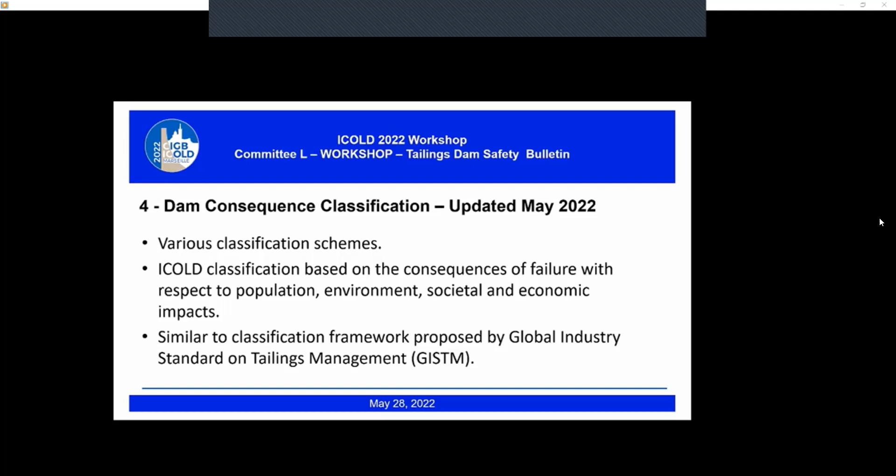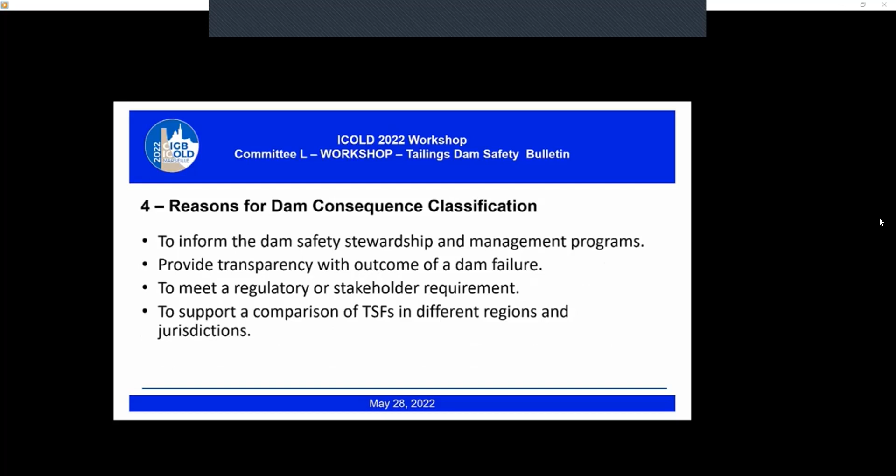The Dam Consequence Classification is used to inform the dam safety stewardship and management programs, provide transparency to external stakeholders on the outcome of a dam failure, to meet a regulatory or stakeholder requirement, and to support a comparison of TSFs in different regions and jurisdictions.

Dam Consequence Classification is used to inform the selection of design loading criteria. The design criteria based on dam consequence classification is typically considered as a minimum. Other factors need to be considered when establishing the design criteria, such as the potential impacts to the owner and the potential risks to life safety.

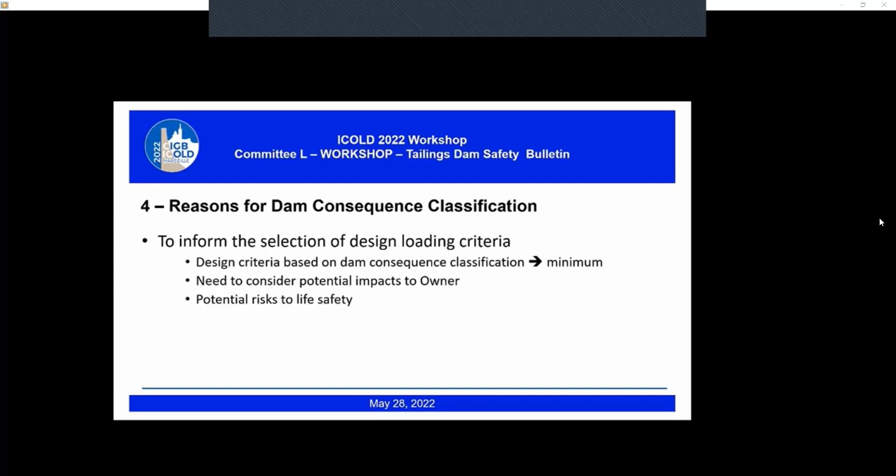When classifying a dam, we assume that a failure mode may occur that is physically possible and has a technical basis for occurrence. This has to be a very rigorous undertaking to demonstrate which failure mode you're considering.

And the dam consequence classification is supported by an estimated runout or inundation. That does not necessarily mean a detailed runout or inundation study—it could be simplified as well.

A confusion that we often run into is that consequence classification is used interchangeably with risk. That is not the case. We're just focusing on the consequences here. We're not addressing the likelihood in the consequence classification, and therefore the consequence classification should not be considered as a measure of risk, because likelihood is not taken into account.

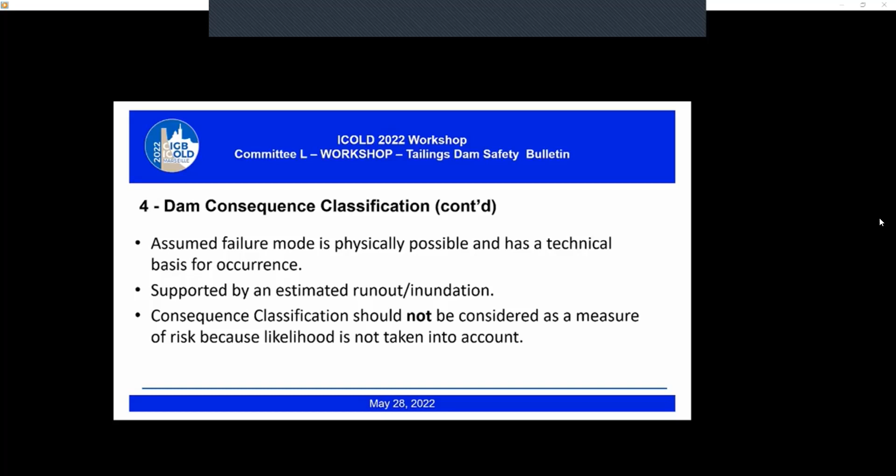We recommend that the dam consequence classification be done for two conditions: the sunny day or fair weather failure condition, and the flood failure or wet weather failure condition.

Often, the dam consequence classification is initially assessed qualitatively with a simplified approach. More detailed dam breach analysis and inundation may be required for high consequence classification dams and above.

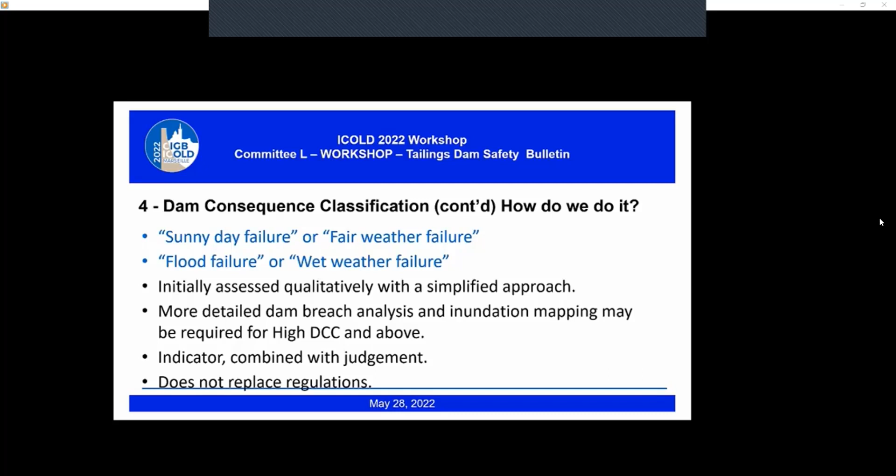The dam consequence classification that is developed needs to be considered as an indicator and still needs professional judgment to arrive at the consequence classification. And obviously, the dam consequence classification scheme does not replace what's required by regulation.

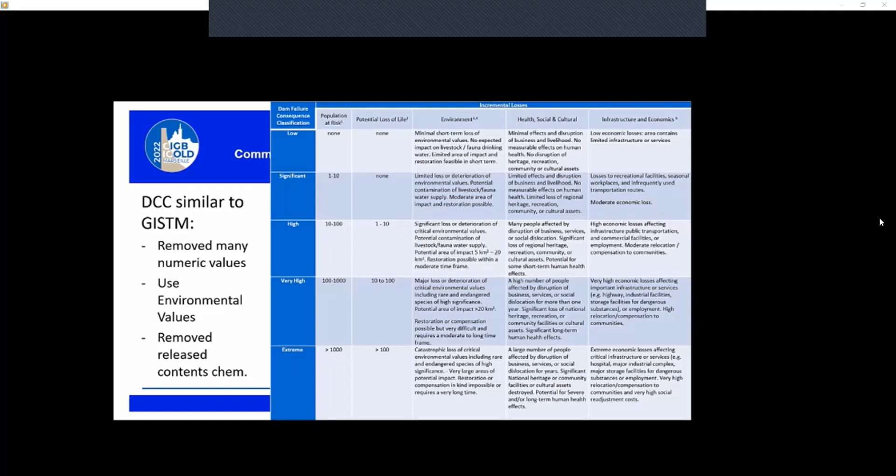So just to focus in on the high consequence classification: population at risk between 10 and 100, potential loss of life between 1 and 10. Under environment, a significant loss or deterioration of critical environmental values, and we define those. Potential contamination of livestock, fauna, water supply.

We're often asked, well, what about human water supply? Well, that is picked up under health, social, and cultural, as well as infrastructure and economics, in terms of providing replacement water supplies. The potential area of impact between 5 and 20 square kilometers, and restoration possible within a moderate time frame. And what does moderate mean?

Well, again, that becomes jurisdiction specific. In some cases, restoration can occur within a few years and be quite satisfactory. In other cases, it may take longer to get there, but that still may be considered as a moderate time frame.

Under health, social, and cultural, many people could be affected by disruption of business, services, or social dislocation, significant loss of regional heritage, recreation, community, or cultural assets, and there could be some short-term human health effects.

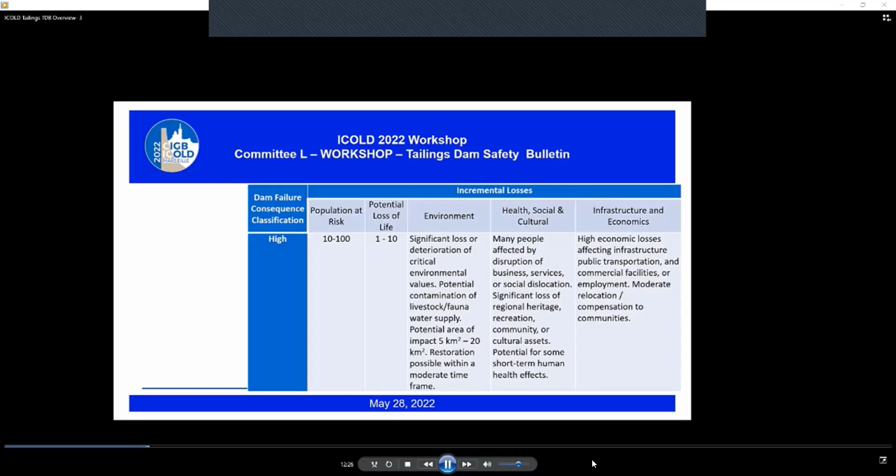Under infrastructure and economics, high economic losses affecting infrastructure, public transportation, and commercial facilities or employment, with moderate relocation compensation to communities.

There can be a misperception in industry that by designing a dam for high consequences, that is potentially 1 to 10 lives lost, then if the dam were to fail under conditions that were larger than what the design criteria had been adopted, then it would be somehow acceptable to have more than 10 fatalities. That was not the intent of the dam consequence classification framework.

A key purpose of the dam consequence classification framework was to provide a rational, objective, and transparent framework for classifying a dam. So when you say to someone that the dam is classified as significant, that's understood. That means something. Or if you say the dam is classified as very high, that means something.

When it comes to establishing the design criteria for the dam, and we said this earlier, the owner needs to decide on that design criteria that considers potential risk to life safety. As indicated by the ICOLD guidance, extreme loading conditions are being recommended for dams with even one potential loss of life, and several mining companies are adopting that approach.

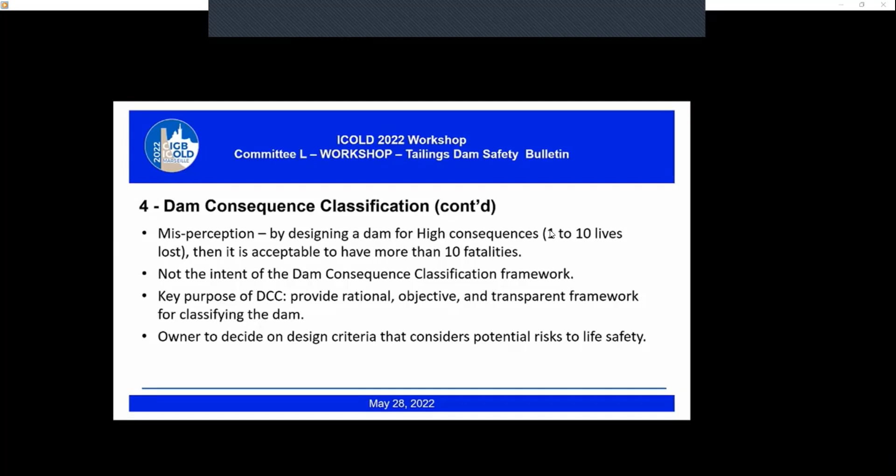Many of you are familiar with the concept of credible failure modes that was introduced by the GISTM in 2020. In 2021, ICMM provided further definition to the credible failure mode concept, but there's still not a consensus in our industry on how to define these.

From ICOLD's perspective, where we focus on the design and safety assessment, we did not address credible failure modes. You will note that in doing the dam classification, we're asking that you focus on failure modes that are physically possible and have a technical basis for occurrence.

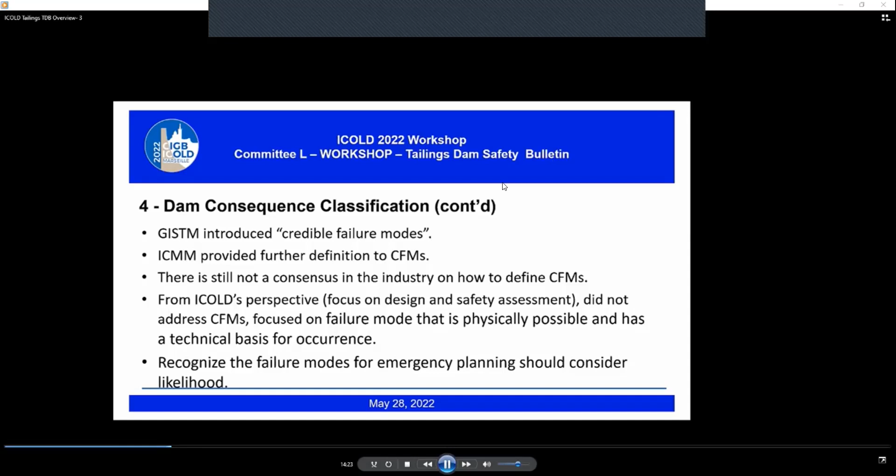Now, we do recognize that for emergency planning, this may not be appropriate, and that the failure modes for emergency planning should consider likelihood.

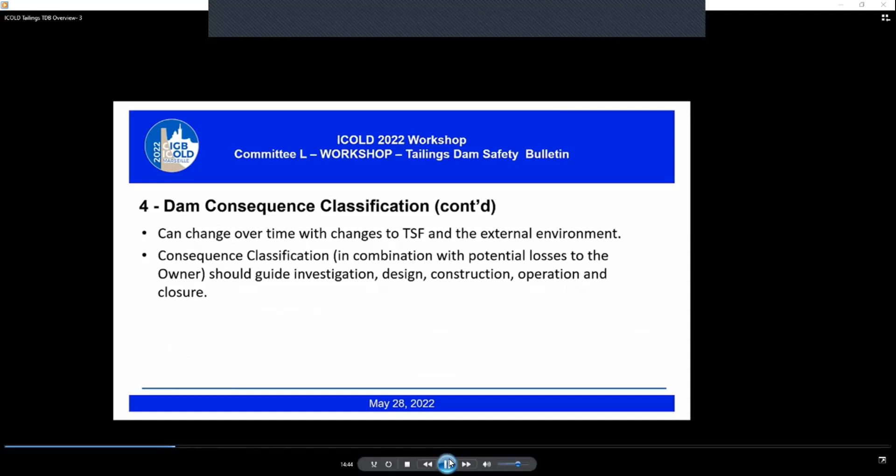This last slide on Chapter 4 indicates that the classification can change over time with changes to the TSF and external environment. The consequence classification, again in combination with potential losses to the owner, should guide the investigation, design, construction, operation, and closure. Our next speaker is Jerry Herzog.

So we're just going to take a pause here for a moment because that's a very important chapter that we just went through. And wondered if anybody had any questions or comments on what they've just seen here.

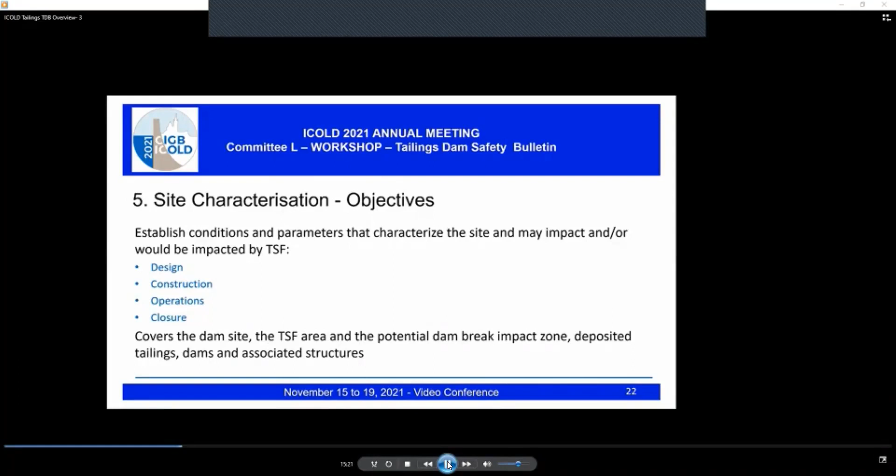The objectives of site characterization is to understand and define the parameters and characteristics of the TSF site that might be impacted by the TSF, or that might impact the TSF design, construction, operation, and closure. It covers not only the dam site itself, but the tailings storage area, as well as the potential dam break impact zone, and the tailings themselves, as well as any other important structures.

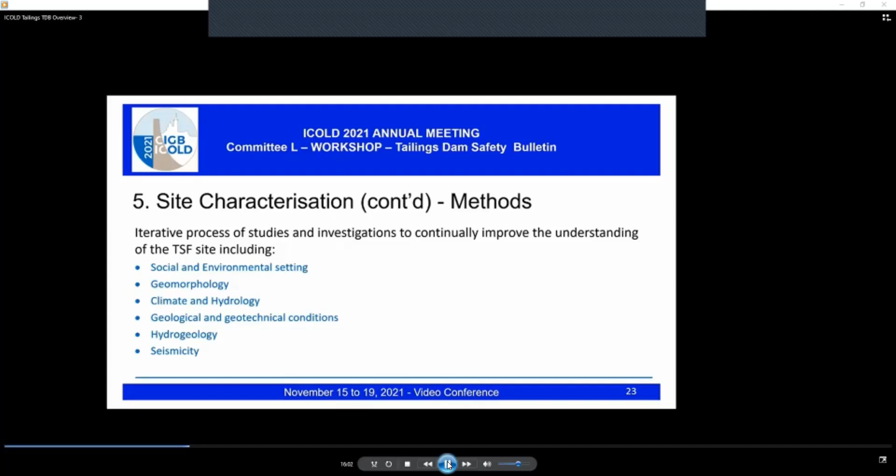The objectives—next slide, yeah. To achieve those objectives, we describe an iterative process of studies and investigations to gradually improve our understanding of the TSF site from many different perspectives: social environmental setting, geomorphology, climate, hydrogeology, seismicity, and most importantly, for the integrity of the dam, the geological and geotechnical conditions, which I will talk about a little bit more. Next slide, please.

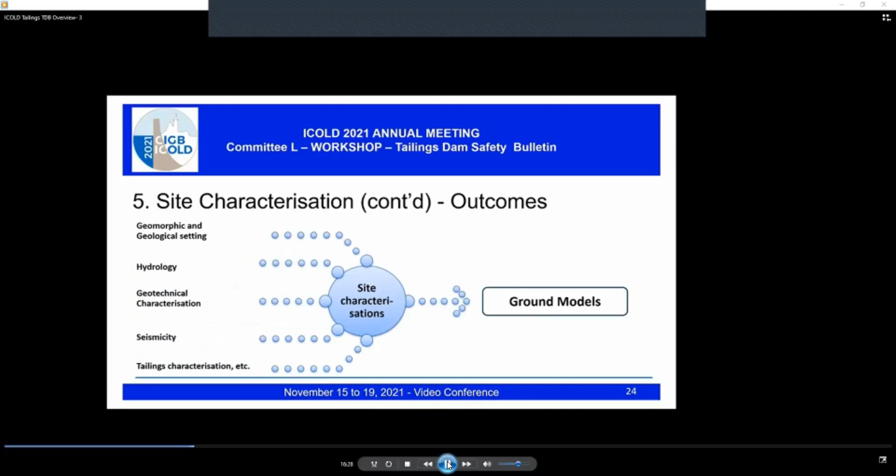The outcomes of the site characterization, which is basically a process of integration of knowledge, are ground models. The ground models describe a specific setting of the TSF site from geological, hydrogeological, or other perspectives. The ground model captures the factual conditions and information for the respective objective of the model. It might be a geological model that captures the setting.

The ground model is then used to define design models, which capture interpreted conditions to be used in specific design for specific purposes—for example, assessment of seepage or assessment of seismic induced deformation of the embankment. Finally, the design model is then transformed into an analytical model, which is the actual numerical model in which the assessment is carried out. It might be a finite element model, finite differences model, or limit equilibrium model for stability assessment. Next one, please.

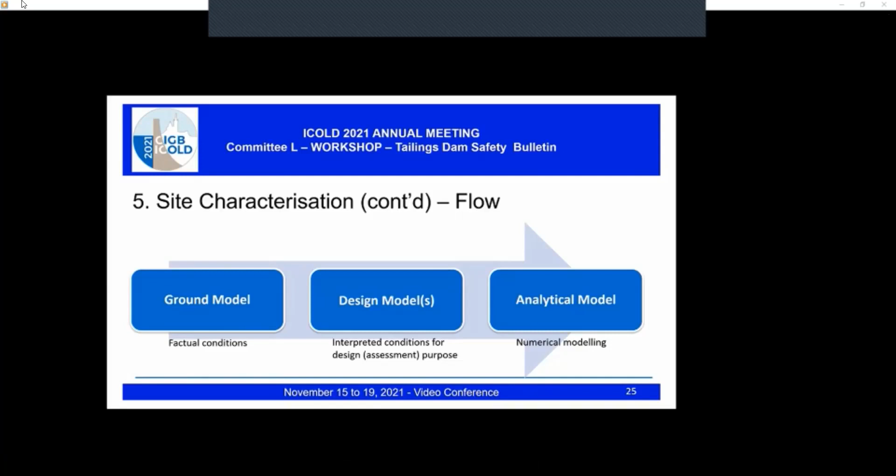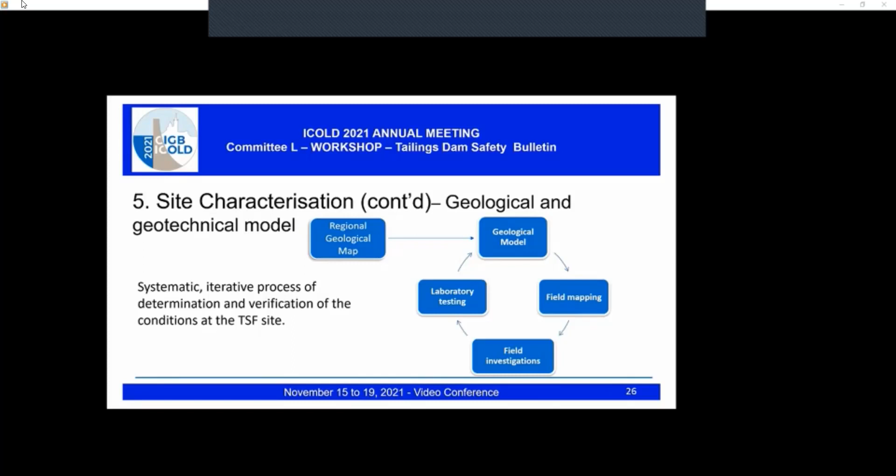In terms of the geological and geotechnical model, we start the process with understanding the regional geology using regional geological maps, which are generally available. These are the basis for the TSF site geological model. The site geological model is then refined through field mapping, field investigation, and laboratory testing in a systematic iterative process to determine and verify the conditions of the TSF throughout the design life, from planning to closure. Next one.

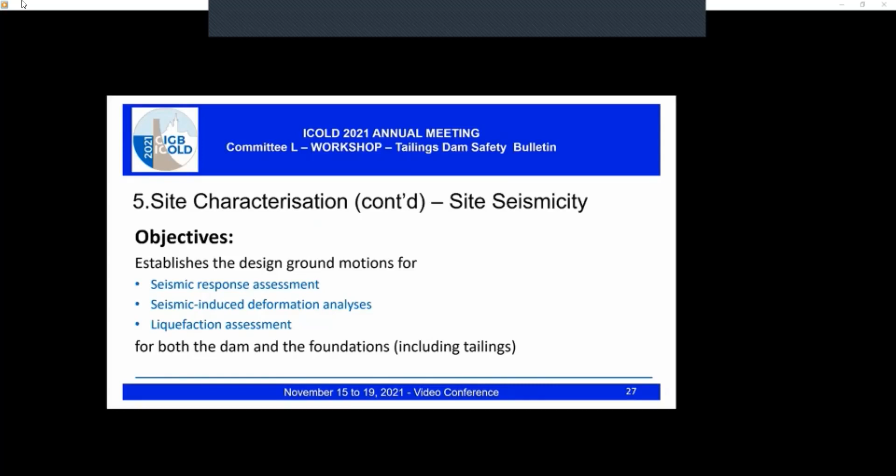Site seismicity is a very important aspect of TSF performance, and the objective described in our bulletin is to establish design ground motions for seismic response assessment, seismic induced deformations, and liquefaction assessment for both the dam body itself and the foundation beneath. Very importantly, we have to establish those for the tailings themselves, for upstream and centreline structures, which partly or fully depend on the tailings integrity.

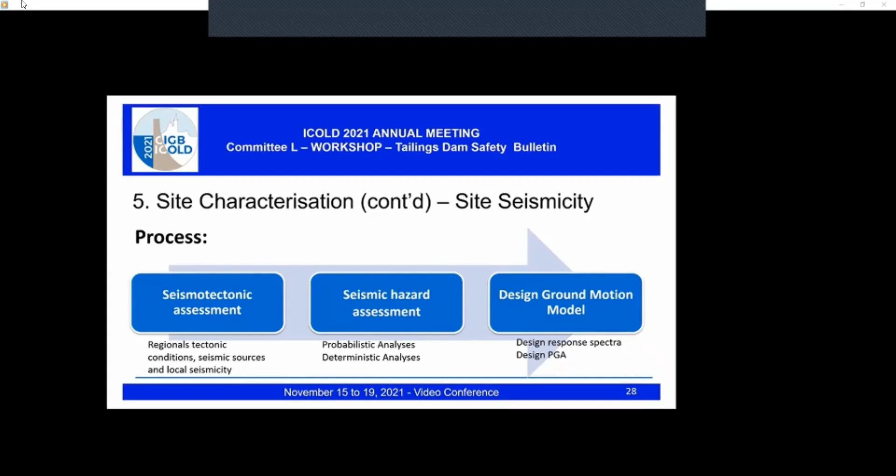The site characterization for site seismicity is described as a process of 3 steps, starting with a seismotectonic assessment, in which we define the regional tectonic settings and conditions, identify seismic sources, and define local seismicity. The next step is a seismic hazard assessment, typically carried out through probabilistic or deterministic analysis. The last step is the design of the ground motion model, which is then used as an input for design response spectra and design PGAs for a given facility.

The way it's written in our bulletin, we provide thorough recommendations for characterization of the seismic setting. We recommend that site-specific hazard assessment is performed for most tailings dams, definitely for those with high or extreme consequence category. We put more emphasis on the probabilistic method, but recognize the importance of the maximum credible earthquake defined by deterministic methods, while recognizing that the MCE might be quite frequent in highly seismic zones. In relatively stable regions such as Australia, the design earthquake might not need to be greater than an 84th percentile of MCE, because the MCE doesn't really happen that often.

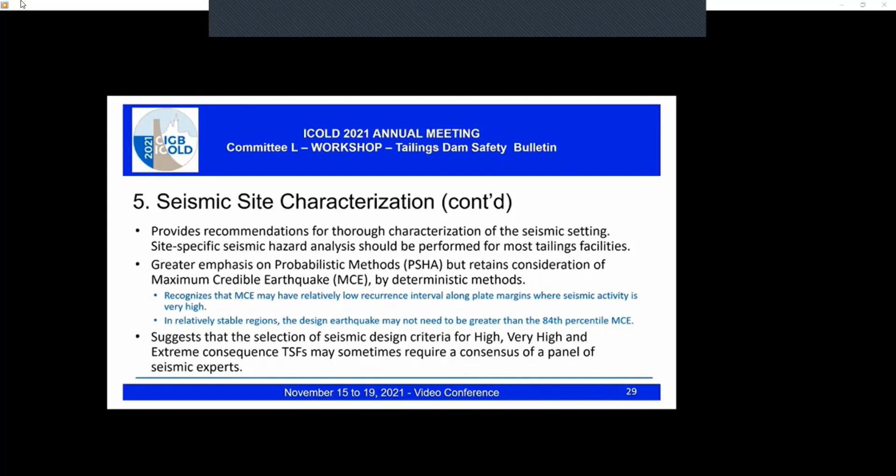In recognition of the very complex process in defining the seismic condition for some sites, we recommend that for very high and extreme consequence tailings storage facilities, it's appropriate to engage a panel of seismic experts to get a consensus of the site-specific seismic hazards.

Tailings characterization is part of the site characterization, but for its importance we have devoted a separate chapter to it in our bulletin. This chapter is based on ICOLD Bulletin 181, Tailings Dam Design Technology Update, which is now available for everyone to purchase and access through the ICOLD website.

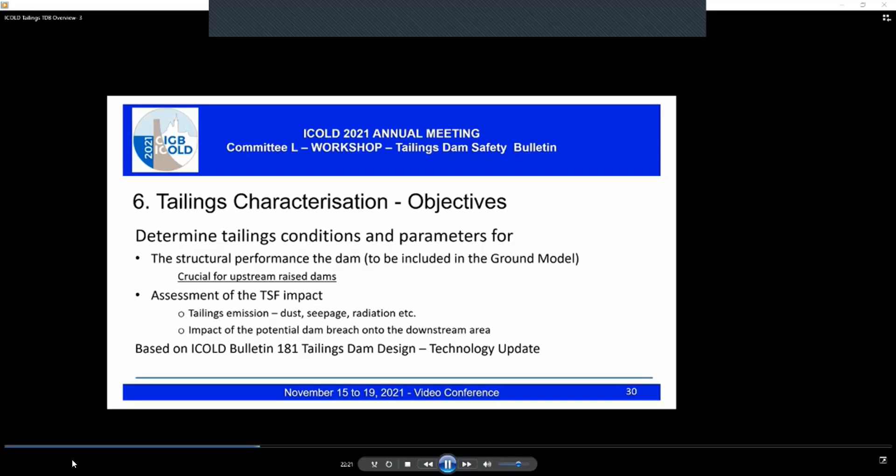The tailings conditions and parameters are important from two perspectives: the structural performance of the dam, and the impact of the TSF on the environment. The structural performance is dependent on tailings, especially for upstream raised dams. The assessment of TSF impact on the environment includes tailings emissions through dust, seepage, radiation, etc. It also impacts potential dam breach and the impact onto the downstream area, which we'll talk about a little later on.

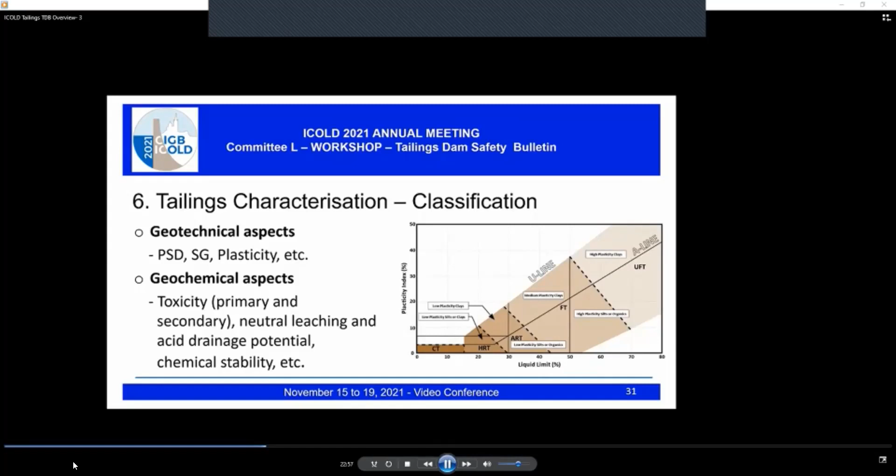The first step in tailings characterization is classification, and we follow two aspects, geotechnical and geochemical, in describing and classifying the tailings. The geotechnical aspects follow conventional geotechnical tests, such as PSDs (particle size distribution), specific gravity, and plasticity, while geochemical aspects follow toxicity, neutral leaching, acid drainage potential, and other chemistry. The draft bulletin follows the classification system introduced in Bulletin 181, separating tailings into 5 broad categories, shown on the table in front of you.

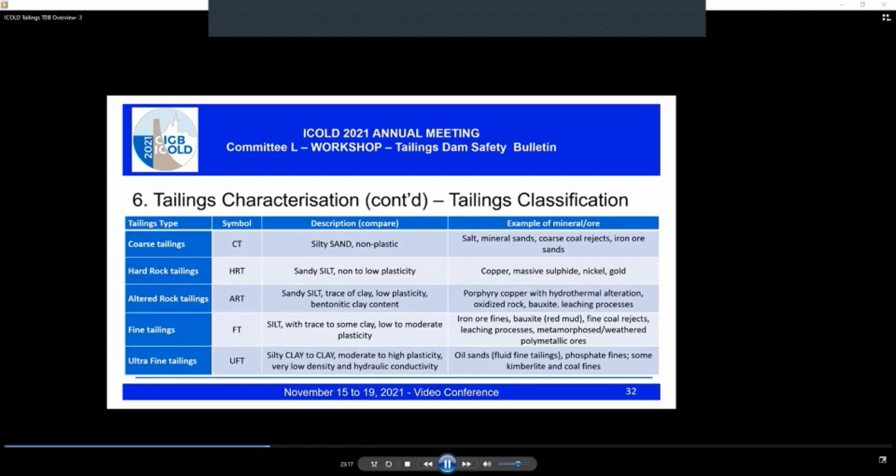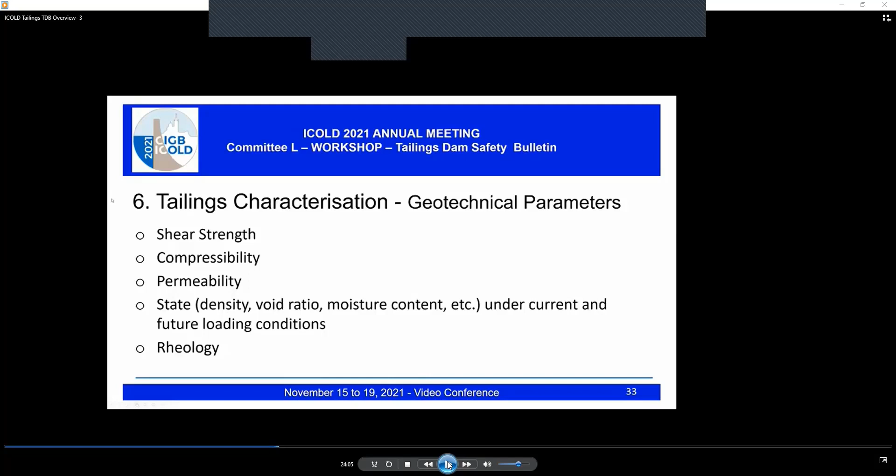So we'll move into a talk. Andy Small will lead this portion on risk-informed design and other aspects. Andy? So good day, colleagues.

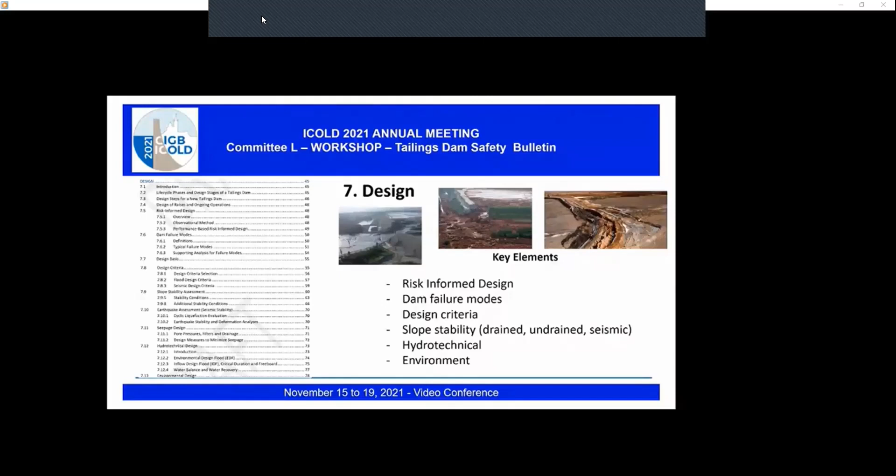Risk-informed design - many of you are familiar with it, and you're aware that it goes beyond the traditional standards-based approach. David talked about the consequence classification earlier, fair weather and flood classifications, which are really used to inform the flood designs and the earthquake seismic design.

There isn't really a linkage for things like internal erosion, for example, to the consequence classification. So we see the risk-informed design as quite complementary to the standards-based design, and we refer to it as an enhancement.

The risk-informed design also has a strong linkage to the observational method, and many people don't understand the observational method. They see it as synonymous with monitoring the dam. That's not the case. To use the observational method properly, it's necessary to predict and measure the performance, and if the performance isn't suitable, then you implement contingency measures.

That's the piece I often see missing - owners have not actually developed designs for contingency measures. They don't know if those contingency measures can actually be implemented. If they do not have contingency measures and they cannot be implemented, then they are not following the observational method - they're just monitoring. The observational method doesn't work very well for dams with brittle elements, such as Brumadinho.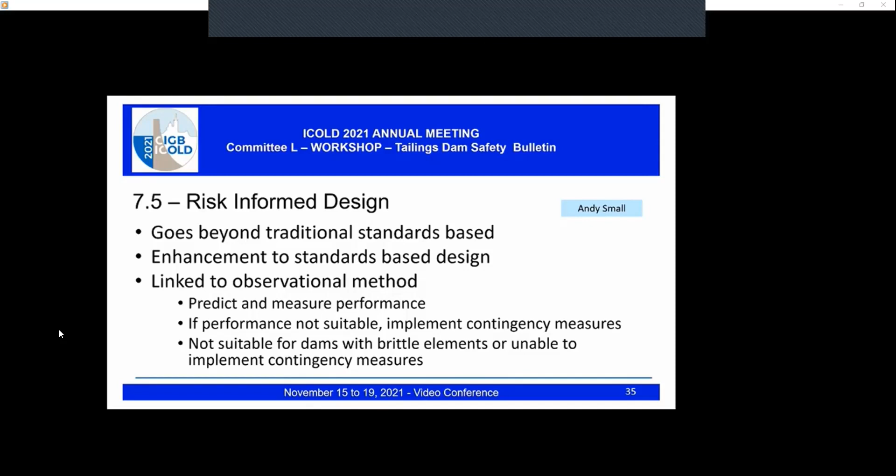I expect most people on the phone are familiar with Morgenstern's DeMello lecture in 2018, where he introduced this concept of performance-based, risk-informed, safe design. These terms actually have been used in other industries - he just brought them over to our practice. If you go into his DeMello lecture, you will understand more about what he's describing.

With his blessing and approval, we distilled his DeMello lecture down to the following points: identify the failure modes, identify the performance parameters, establish the performance criteria, establish trigger action response plans, monitor and document performance, and take action depending on that performance.

Now, it looks very similar to the observational method, and in fact it is. But what the PBRISD process calls for is more significant rigor, a much deeper dive examination on the failure modes when establishing the performance criteria, supported by very robust analyses. The TARPs are a lot more detailed, and so on. So there is a similarity, but there's a higher level of rigor if you want to use this approach.

We're seeing this approach being used particularly in Alberta and Canada. And the owners are providing safety statements on their dams based on their performance, and in fact are not necessarily reporting things like factor of safety. They're showing how the dam deformations are performing as expected, and therefore the dam is safe.

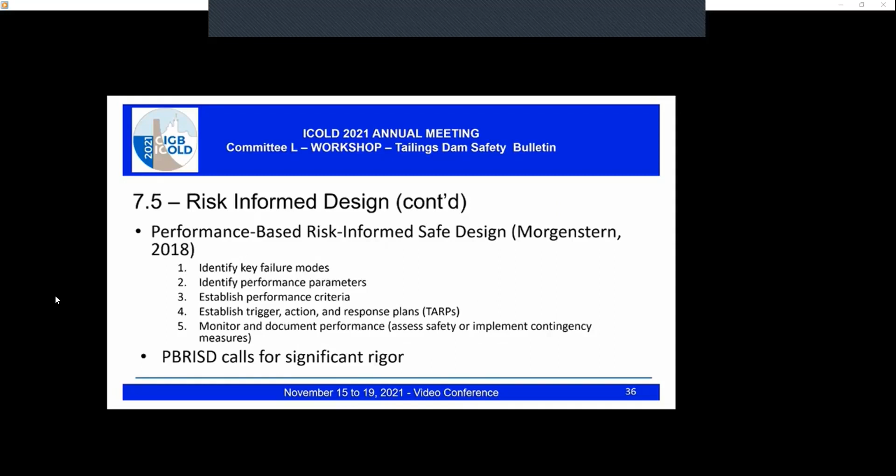We're all aware that slope stability is a common cause of TSF failures, and there's been many deaths, lots of contamination, and significant losses to the owner and society. We also need to acknowledge that the potential for slope failure exists in closed and decommissioned TSFs.

Brumadinho, for example, was considered closed, but yet it failed. And there's a misperception in the industry that if you can close a facility and get the water off the top, the facility would be safe enough and not threatened by a slope instability. We need to pay close attention to closed facilities as well as operating facilities.

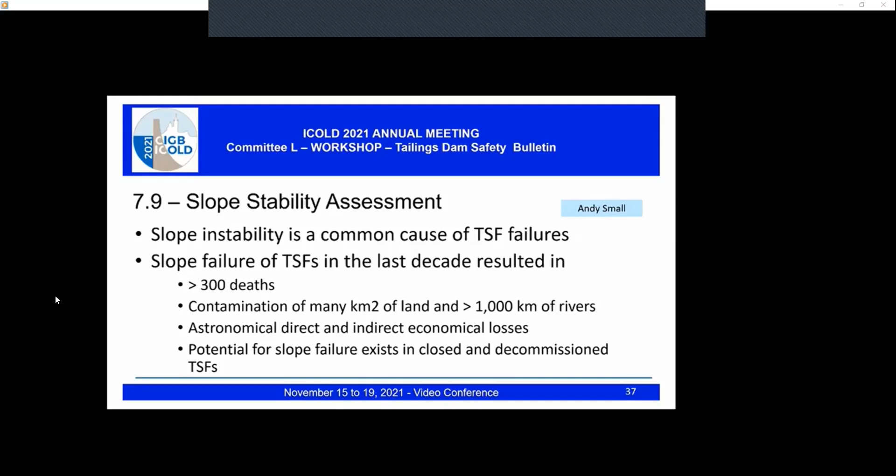Jerry talked about the site conditions, and there's a very extensive discussion in the bulletin on site characterization. That's intended to help the practitioner understand what we mean when we say good practice with regard to site conditions. We're going to talk about targets, factors of safety in a moment, but we anchor it to having a very solid understanding of the site conditions.

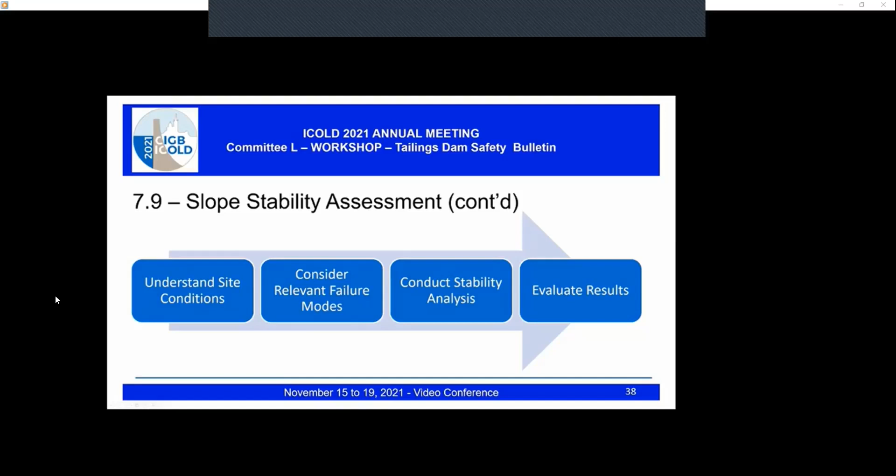Then going through the different failure modes that could affect the slope stability, conduct a stability analysis and evaluate the results. The section we have in the bulletin is actually entitled Slope Stability Assessment and not Slope Stability Analysis, because we talk about limit equilibrium as well as nonlinear deformation analyses.

You may have heard Morgenstern's lecture in 2016 in Hong Kong about how he was saying we as an industry need to move away from limit equilibrium analyses and move more into deformation modeling to assess the safety of a dam. That fits with his PBRISD approach.

But we all know limit equilibrium analysis is not going to go away. It's still a very important tool, especially for new dams. We spend a lot of time in the bulletin trying to educate people on how to do the limit equilibrium analysis properly. We talk about the challenges with them, the limitations of limit equilibrium analysis, and we spend a lot of time on the conditions when contractive elements are present.

And you're going to see several slides on that in a moment from Raphael and Paul. We try to emphasize that limit equilibrium should be used as a screening tool and that it's not perfect. But at the same time, these deformation analyses are not the panacea a lot of people believe it can be.

We are aware of several situations where there was garbage in, garbage out. If you still don't understand the materials properly, then what you'll end up with is false results. So neither of them is perfect, but the two can be complementary. Next slide.

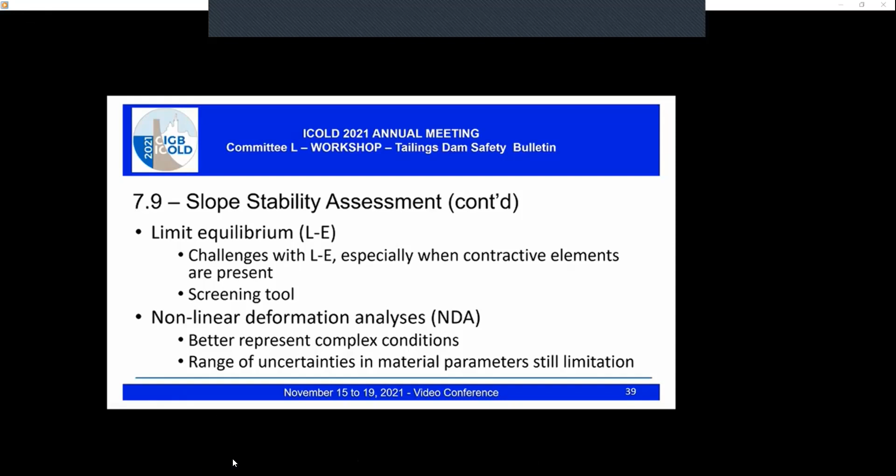So this is just a typical cross-section of an upstream constructed tailings dam and the types of things you would have to consider when doing the slope stability assessment. This is where typically we would have contractive tailings. I know many people in the world are saying these types of designs shouldn't be undertaken, and we're moving away from this, but we are aware that there are many dams in the world that still look like this. The material properties is bolded on this slide just to reinforce what Jerry was saying earlier about characterization and properly understanding all the materials within the tailings dam and the foundation.

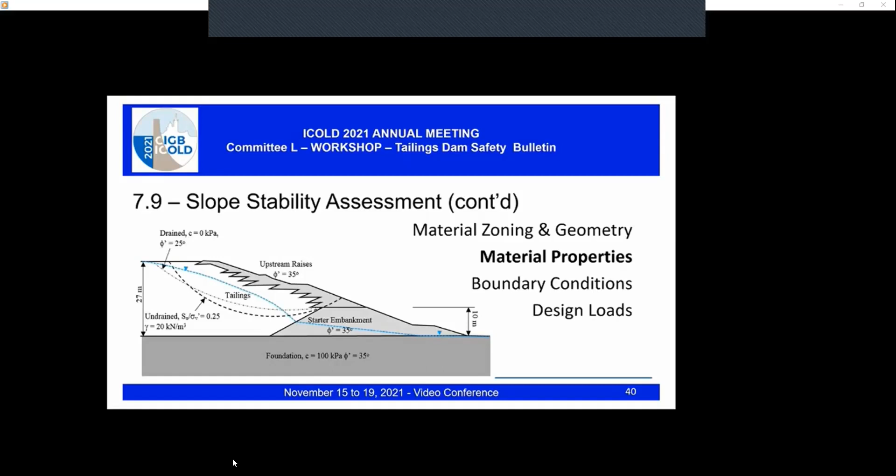When undertaking a slope stability assessment, we talk about a number of considerations, such as the consequences of failure, how complex the geology and situation is. In the site characterization discussion, we talk about how it's important to assume the site is complex until you do enough investigation to prove otherwise. Time and time again, we run into situations where sites are represented by oversimplistic models. If you have dilative tailings and dilative foundation, things are far more simple than contractive conditions. How are the variabilities and uncertainties being addressed, especially early in the design stages when your site characterization may be limited?

Strain incompatibility is a big deal. Morgenstern advised me that at Mount Polley, they did a FLAC analysis that showed the foundation clay actually went past its peak and hit residual before the rock fill shell got anywhere near its peak strength, and a limit equilibrium analysis could not pick that up. The other aspect is how you interact with the observational method - how have you embraced the observational method in your analyses?

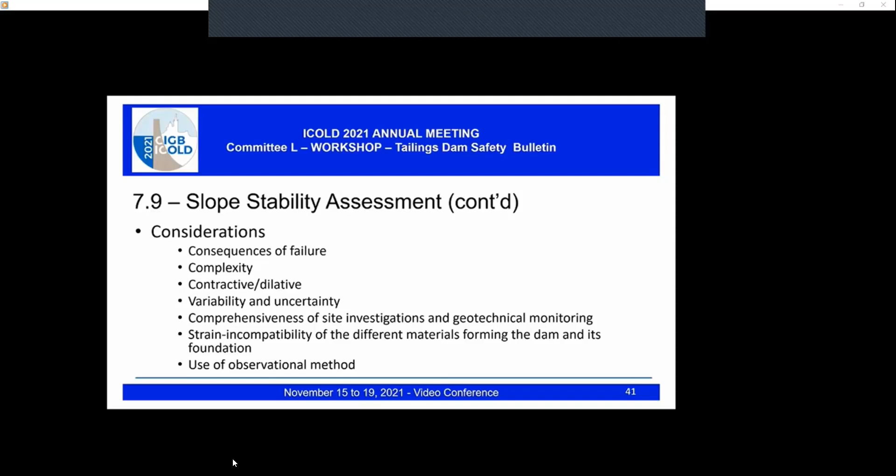These targets apply to both planned and operating sites as well as closed dams. And like I said earlier, this is anchored to good practices for site characterization, selection of parameters, and so on.

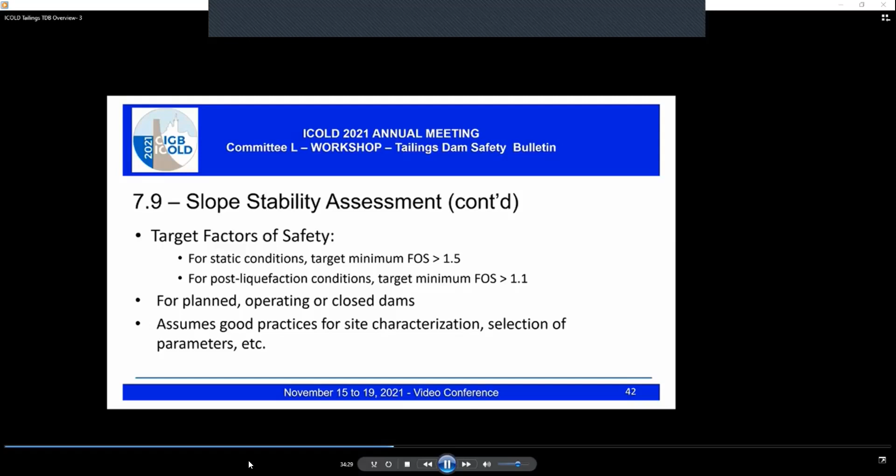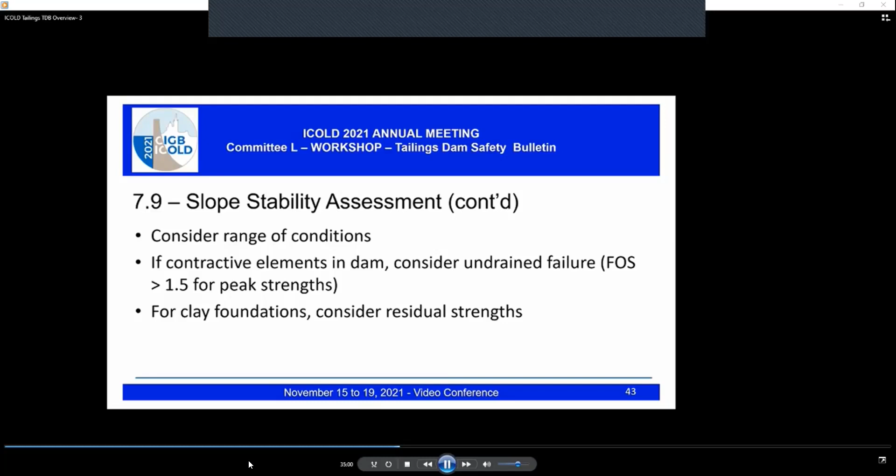When doing a slope stability assessment, there's a range of conditions, and we describe those in the bulletin. If you have contractive elements in the dam, we still are asking for a factor of safety greater than 1.5, assuming peak strengths. Raphael and Paul are going to talk about the post-liquefaction conditions and how those contractive elements are to be dealt with in a few slides here. And when we're talking about clay foundations, we need to be considering the potential for the clay moving to residual strengths.

You might be looking for target factors of safety on end of construction, rapid drawdown, and seismic and post-seismic loading. We do not provide those in the bulletin. We talk about it, but that's left to the engineer of record, the RTFE, and review boards to land on specific targets for those conditions because they're very site specific.

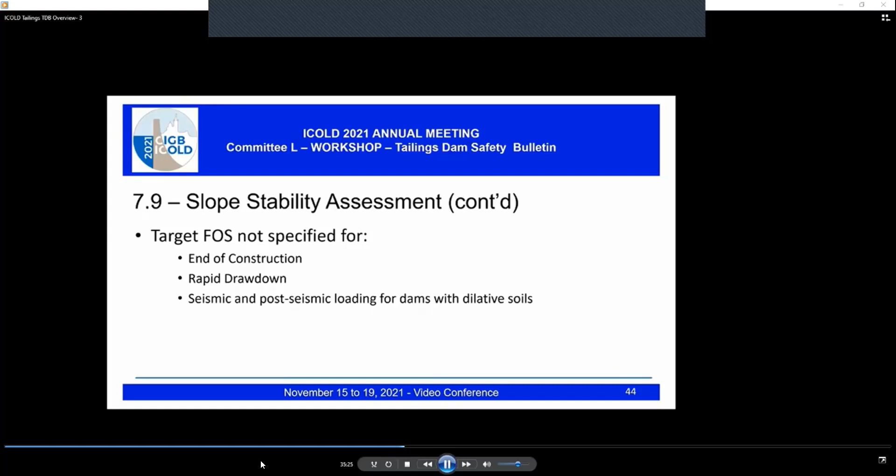Now, we use the word 'target minimum' throughout the document. What we're trying to do is avoid the situation where one number is cast in stone. We're asking the engineers, RTFEs, accountable executive officers to develop targets that make sense for their project. We're providing these as initial targets, initial screening values, but the EOR should be reflecting on those targets and asking whether they're appropriate for their site and whether they handle all of the different things. We're suggesting, for example, the target factor of safety may need to be increased for a closure, to handle uncertainty, strain incompatibility, and so on. Alternatively, it may be appropriate to decrease the target factor of safety.

And we see that in the oil sands in Canada, where they target a factor of safety of 1.3 because of the comprehensiveness of their site characterization and how they have embraced and implemented the observational method. So these numbers should not be cast in stone. We know that's probably what's going to happen, but we try to provide enough information for the practitioner to develop a target that's particular to their site. The next slides then get into more details on adjustments related to contractive tailings. I think the next slide is over to Raphael.

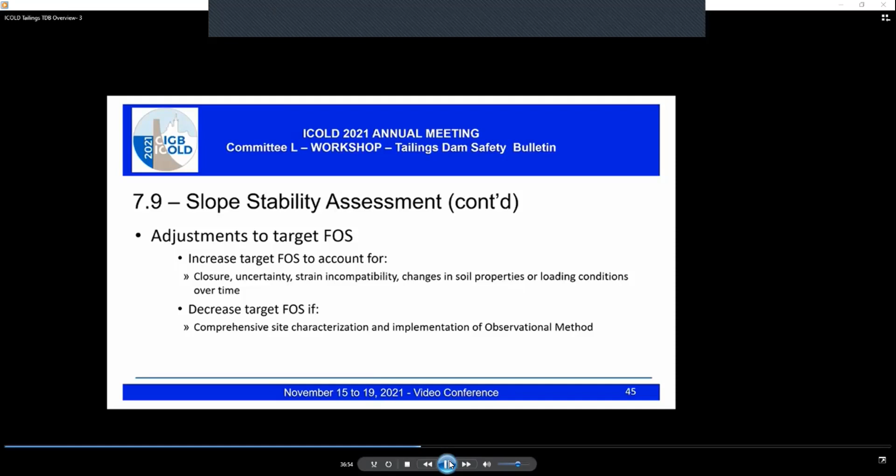Thank you, Andy. Brief introduction to the appendices in the bulletin. The bulletin contains two appendices, accompanying the section on slope stability. I will introduce the first one, on shear strength and deformation behavior of soil and tailings. Paul will introduce the second, on the stability analysis framework for tailings dams in contractive soils.

These two appendices were prepared and sent to a number of reviewers across the world for their review and comments. They have been reviewed, and I want to share one comment from a reviewer: 'I must say the appendices provide a very valuable contribution to the clarification of many issues important in the assessment of the stability of tailings dams. It is a challenge to summarize in a clear way what is in fact a full soil mechanics course in a limited space, but I think the overall goal has been successfully achieved.'

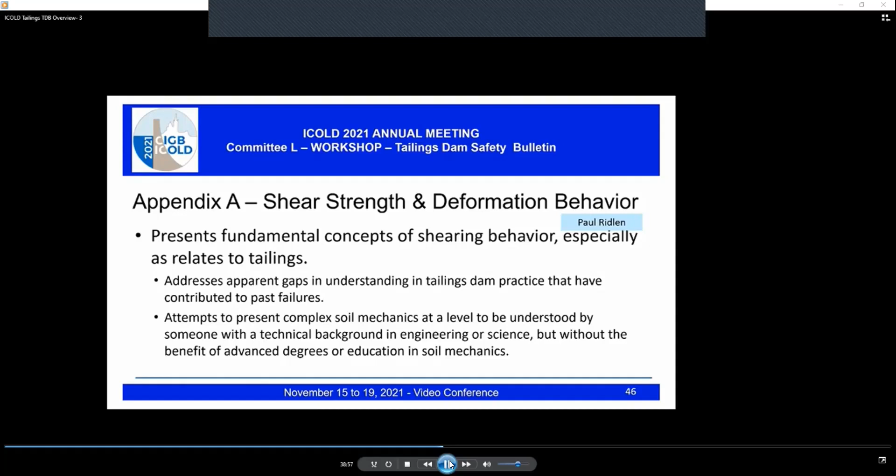It is a complex subject to talk about shear strength and deformation of soils and stability of tailings dams. The appendices don't get into great detail, but Appendix A in particular gives the fundamental concepts of shear behavior as they relate to tailings. This was included because there were felt to be gaps in understanding in tailings practice, and this gap in technical understanding has probably contributed to past failures. Appendix A tries to present complex mechanics at a level that can be understood by someone with a technical background.

But this is for someone who doesn't necessarily have the benefit of having attended a course in advanced soil mechanics, while still highlighting the issues important to understand. These include drained versus undrained shearing, dilative versus contractive behavior, strain-softening versus strain-hardening behavior, and brittle versus ductile behavior. All these issues are explained in Appendix A to a level where someone can understand the concept without getting into the details. If someone wants more detail, they can go to any textbook on soil mechanics.

The appendix also provides additional guidance and comments on CPT-based methods of measuring in-situ state and soil properties, on the assessment of liquefaction and residual strength of tailings and soils, on the selection of appropriate shear strength parameters for design and analysis and how conservative one should be depending on the uncertainty, and then the pros and cons of using laboratory versus field data.

The stress-dependent behavior of materials is highlighted. Partial saturation is briefly mentioned, as is progressive failure and strain compatibility between dissimilar materials. The appendix doesn't go into detail on these but mentions the subject and highlights the need to understand all these issues if someone is going to be involved in the design of a tailings dam, especially an upstream tailings dam.

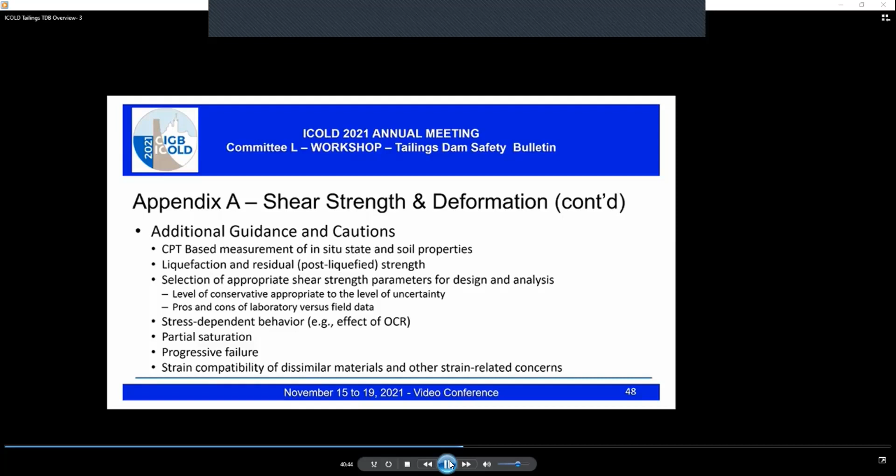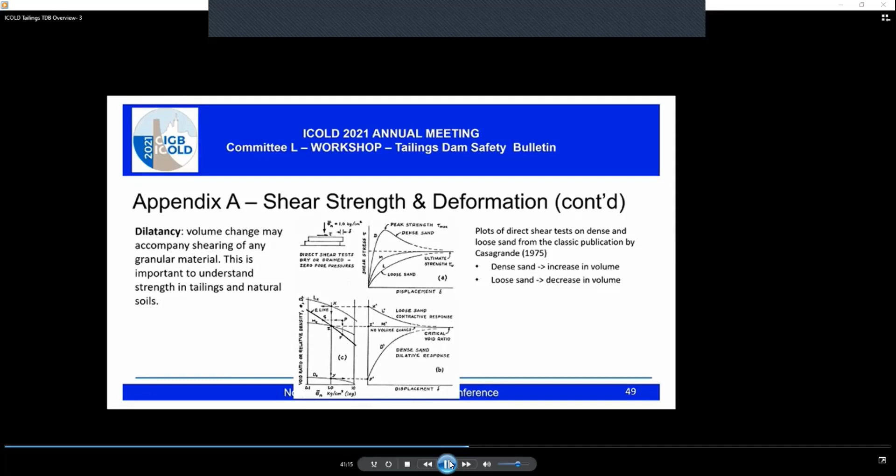One key point the appendix tries to highlight is that shearing in soil is accompanied by volume change, which has very important implications. That diagram in particular is not in the bulletin, but it's taken from the paper by Casagrande, where it shows that depending on if you shear sand, and depending on the density, you will have an increasing or decreasing volume, and you'll also have either a peak strength or an ultimate strength.

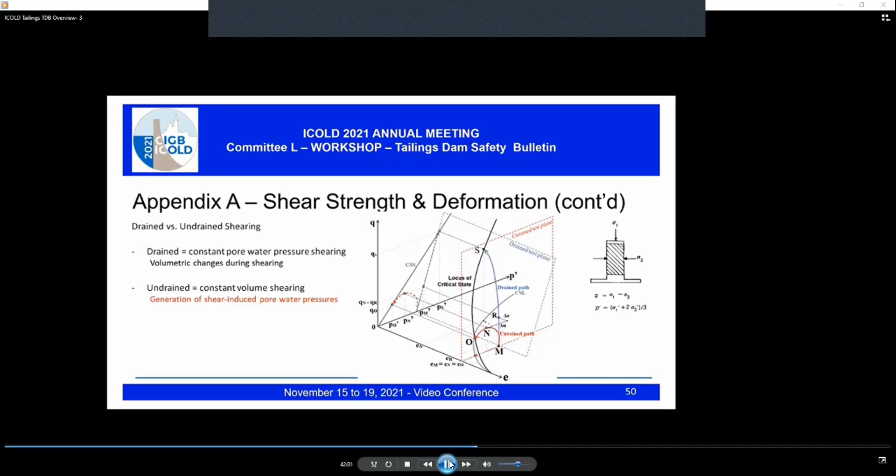Now that diagram is in the bulletin. What it tries to explain is the difference between drained and undrained shearing. What it shows in particular with the undrained shearing diagram is the type of response you could expect if the material were to contract and generate positive pore water pressure. If you had a drained stress path, you would go up to, in this case, a critical state strength—a high strength. Whereas if you have undrained loading, you will have a much lower strength, and that in particular would be what you'd get from a triaxial test on a sample.

The other important topic that the appendix highlights is the difference between dilative and contractive behavior, and the importance of density in determining strengths - not only the stress acting on an element of tailings in the tailings dam, but also the state at which that sample is in relation with the critical state line.

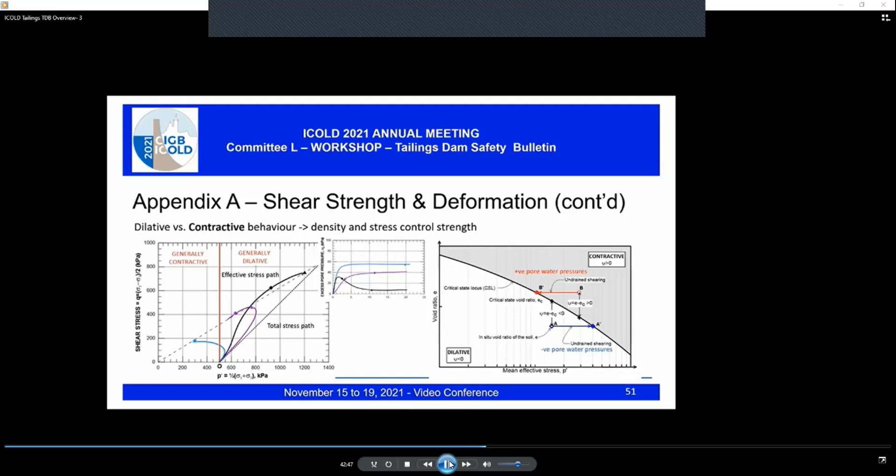Whether it is a loose sample, and during shearing it will generate positive pore water pressures and have a reduced strength, or it would be dilative and generate negative pore water pressures and have a higher strength. If these things are not taken into consideration, one can misrepresent the strength of the material in the field.

Next slide, please. Leading from that, and in particular when it comes to undrained loading, it is also important to realize that some materials can show brittleness as one shears them in the drained manner. Of more interest, particularly for upstream tailings dams, is whether that material, when loaded in an undrained manner, can lose strength. Would you reach a peak, and then after that peak, end up in a residual post-peak critical state strength, or not?

What the bulletin has done is recognize that, depending on how you test the sample and what type of test you do, you might get different results. But still, some materials will generally show little brittleness - that's shown in the diagram on the left, the green zone. Some materials will show slight brittleness, some loss of strength after peak, and some materials will be highly brittle.

Bishop defined brittleness index as the difference between the peak and residual strength, divided by the peak strength. Robertson suggested that brittleness index be renamed strength loss index, to better reflect the use of that parameter to measure the magnitude of strain softening.

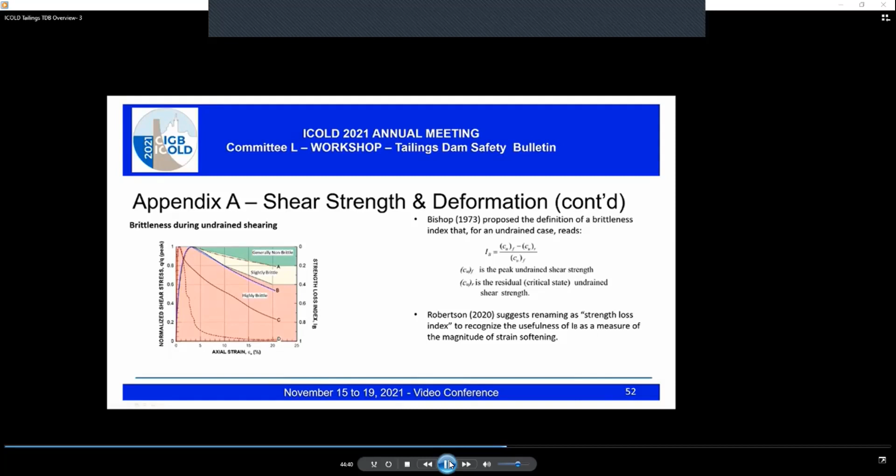I think that will be the last slide. Can we go to the next slide? Yes, that will be it. Thank you.

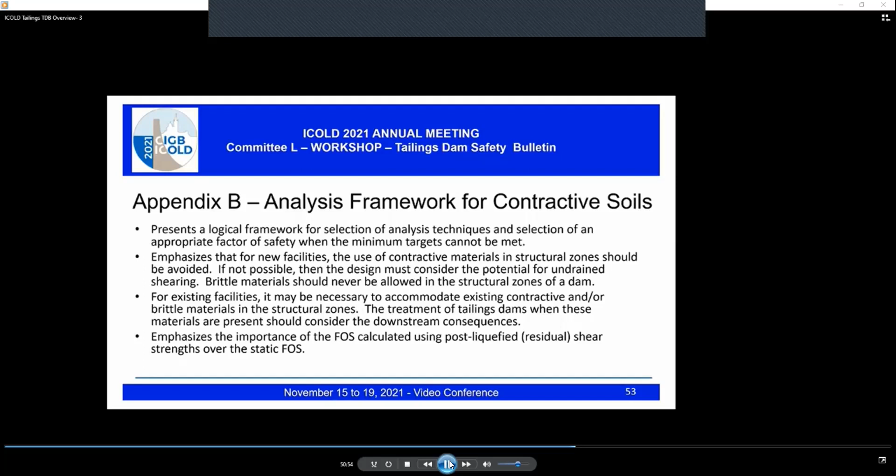So we just introduced the chart that divides behavior into brittle or highly brittle, non-brittle, and slightly brittle or transitional material.

I guess there's a gap, but a little bit of increase in understanding and characterization of brittle behavior. A lot of attention is being given right now in research, writing, and education on recognizing brittle modes of failure.

Two things that are important are the total magnitude of strength reduction post-peak, and the rate of strain. The strain aspect is very delicate and complicated, and is probably oversimplified in this figure here, but what we're trying to do is help recognize these different behavior types.

So we developed a flow chart, shown on the right, that walks through the different cases, asking first: are contractive soils present? And then, if they are present, are they potentially strain softening? If they're strain hardening, or only a slight amount of softening, we describe that as case one in our framework, with a general approach for how to analyze it.

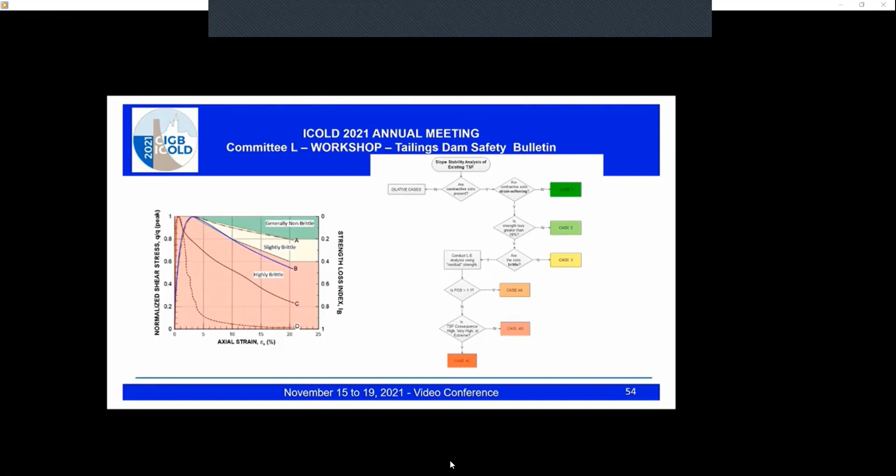So we have to be very careful that we understand all the principles in Appendix A. We have to be sure that we are recognizing the degree of uncertainty in our characterization, trying to minimize that to the degree possible, choosing appropriately conservative parameters, and then using appropriate analysis techniques. And then I do want to, I'll just comment quickly.

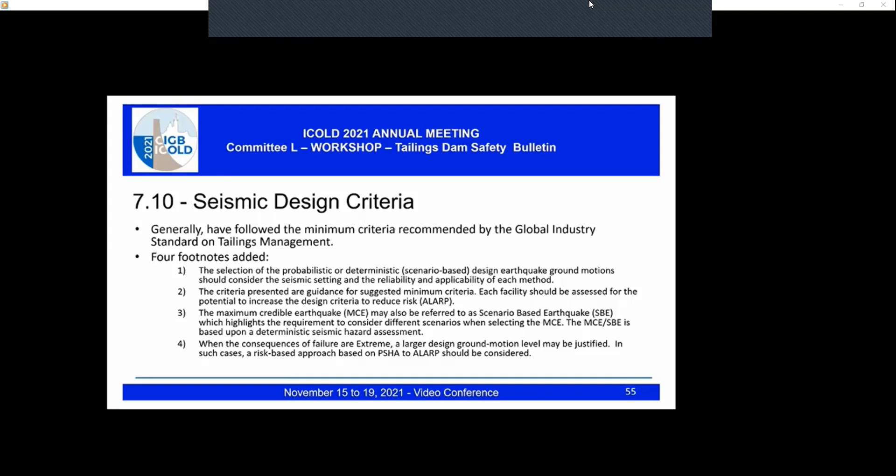Briefly talk about the hydrotechnical design section in our guideline, because TSFs are as much about water as they are about tailings, and so water is a vital part of it.

We typically would have a minimum water pond to allow settling of fines and potentially geochemical attenuation if that's a factor. We would then want some temporary storage of normal seasonal flows. There might be some requirement for ice storage in cold climates, and we might need an environmental design flood if the water quality is unsuitable for release under certain circumstances.

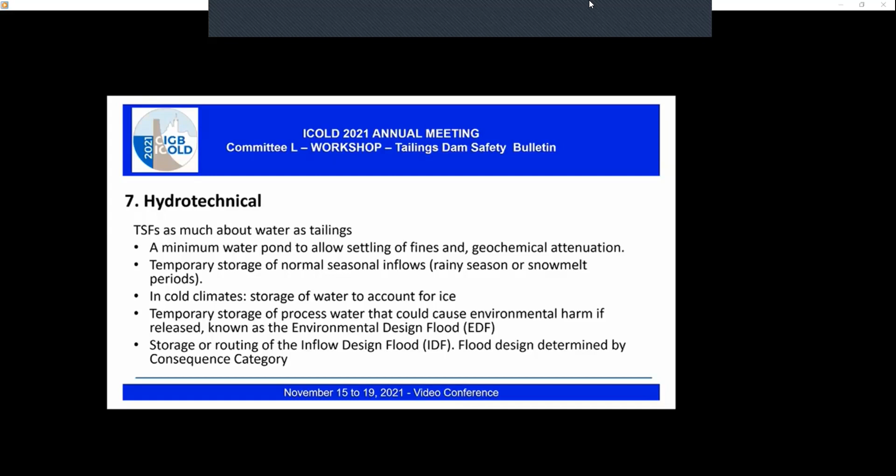And then obviously we have to consider the design flood that would be potentially determined by the consequence category I've been talking about earlier. Next slide, Harvey.

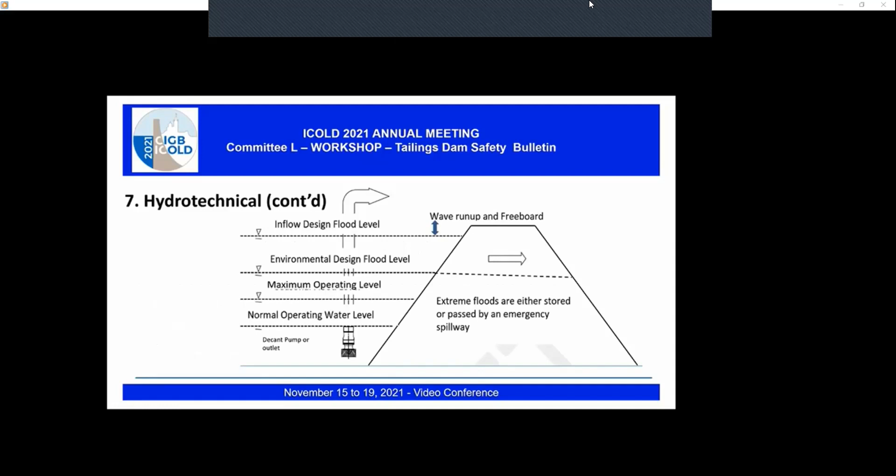Just to pick up on a few pretty important points on this: operating levels should be based on a detailed water balance, and this is very important. I think understanding the water balance in the TSF is a vital part of safety.

ICOLD recommends an emergency spillway is provided, even if you're storing floods and don't expect to have a spill. I think we have to allow for the unexpected, and if possible, we should have some provision if the floods reach a higher level than we expect. What happens to them? It's much better to have a spillway than to have the dam overtopped.

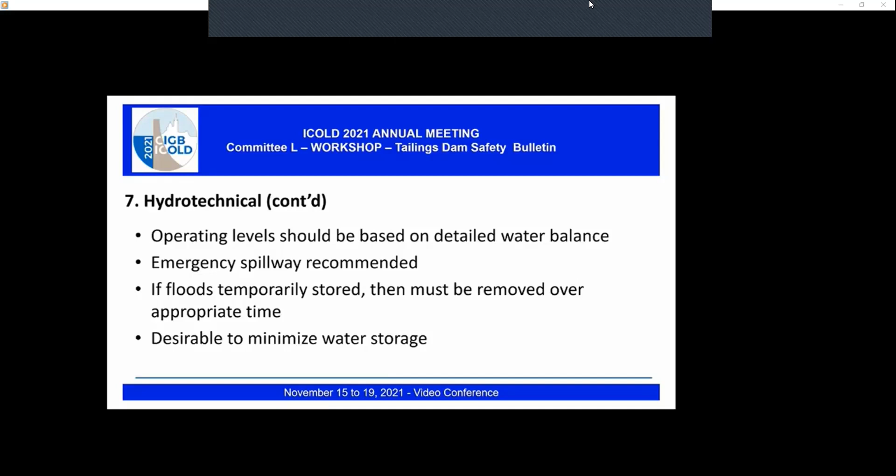If we do consider this environmental design flood, we really have to consider that the water that comes in over that flood event can be removed over a certain time. We've got to understand how it's going to be removed. Things we'd have to consider in our environmental design flood include water quality, the downstream receiving environment, and even public perception. So there's quite a lot of factors to consider.

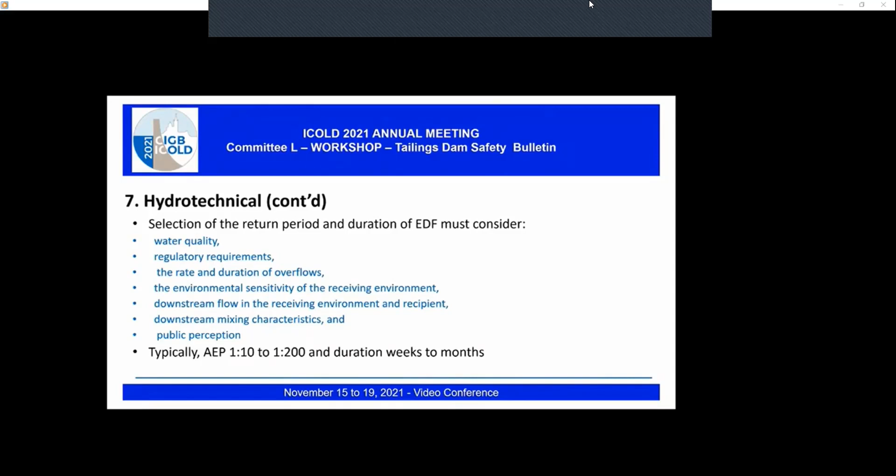Typically, we're looking at long duration events. They could be weeks or months. In some parts of Australia, for example, we consider tropical wet seasons of 2 to 3 months for the inflow of water for these environmental design flood considerations.

Obviously, we need to consider the effects on the receiving water. Moving on now to environmental design, water is a very important part of it, and the receiving water quality, potential for dust emissions, and the effect on flora and fauna are very major environmental issues we need to consider. We're really looking for long-term geochemical and ecological stability for closure.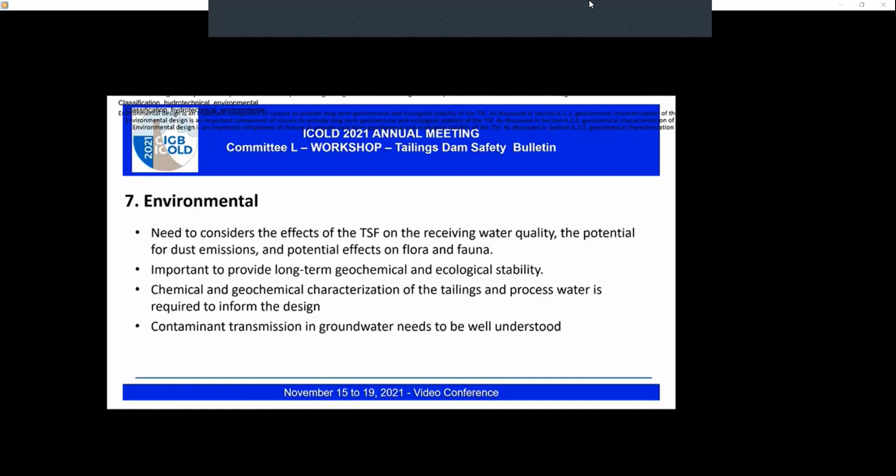To be able to design for this and consider it, we really need a very good understanding of the chemical and geochemical characterization of the tailings and the water that we're using in the dam. Particularly important in a lot of design decisions is the transmission of contaminants in groundwater. We need to understand that really well.

The seepage that comes out of the dam has to be understood, and when I say allowable seepage, it's really what seepage rates are possible without affecting the environment. If we can't control those by normal methods from the tailings themselves, we might have to look at liners and other seepage prevention methods. So this is becoming a more important aspect of contaminants in the groundwater, and it's a design issue we're going to be facing more in the future.

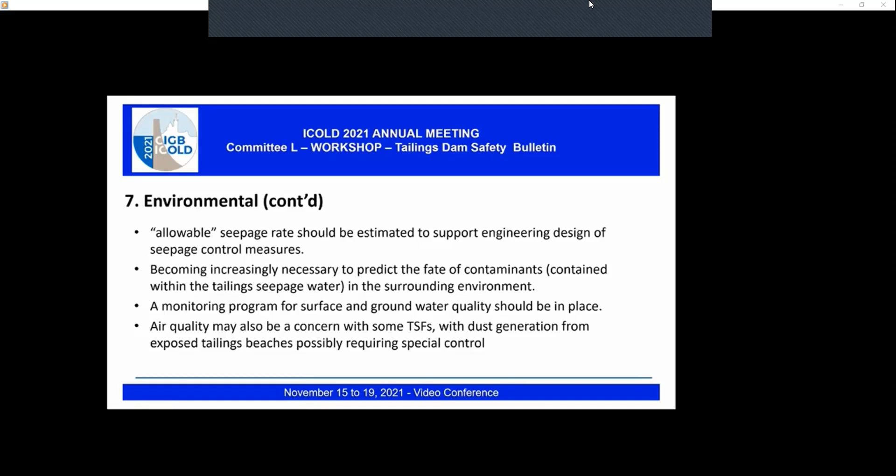Monitoring programs are very vital for tailings dams, and air quality is becoming more important as well.

So if we do find we have environmental issues, there are various ways we could consider mitigating or preventing them from occurring in the first place. Examples of this would be not using cyanide, having a different process to remove some of the concerns, potentially processing tailings to remove properties that are not desirable for the environment, like sulfides, adding minerals or chemicals to neutralize sulfide reactions during the tailings dam operation, or potentially compacting saturated tailings to prevent oxidization of potential acid-forming materials.

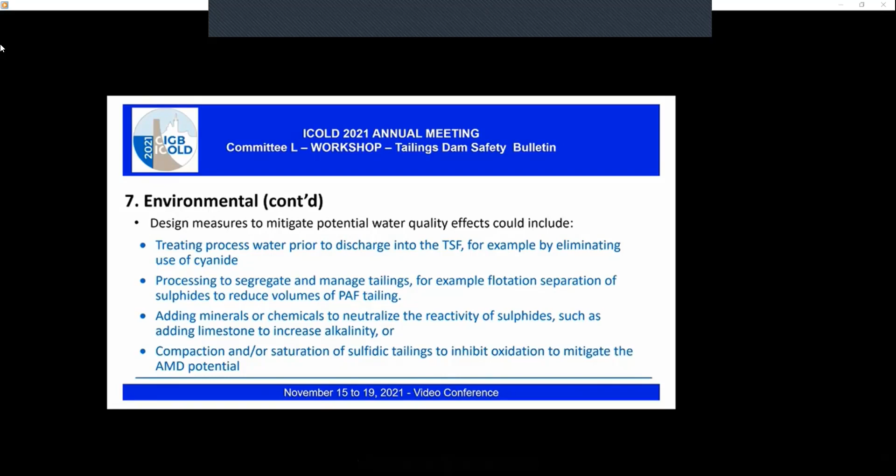Risk management is really what the whole process is about. The whole bulletin, at the end of the day, is about managing risks of our tailings facilities. And the underlying part of that is to understand these potential failure mechanisms. You've heard in these talks that it's never that simple - we have different materials and different types of mechanisms that can be happening. And that's a key fundamental basis for risk assessments.

There are many risk assessment tools - semi-qualitative and quantitative methods - and we won't get into the details of those; there's lots of guidance on that. But the key element is identifying what could happen and what are the preventative controls - what are the things you can do to prevent that from happening.

They may vary anywhere from having extra rigor in your review, analysis and monitoring, to actually constructing some aspects. You want to be looking at your preventative controls - for example, piezometers, measuring deformations, etc. can be your preventative controls so that you do have warning of what might happen.

It's an iterative process with respect to what you've heard termed critical controls and TARPs, trigger action response plans. You go down through levels: you have normal conditions where your piezometers or inclinometers are behaving as you expect. Then you start moving into a condition where, for example, piezometers may be increasing and you may be trying to figure out why they're increasing. If you don't understand why, then you have to dig into that.

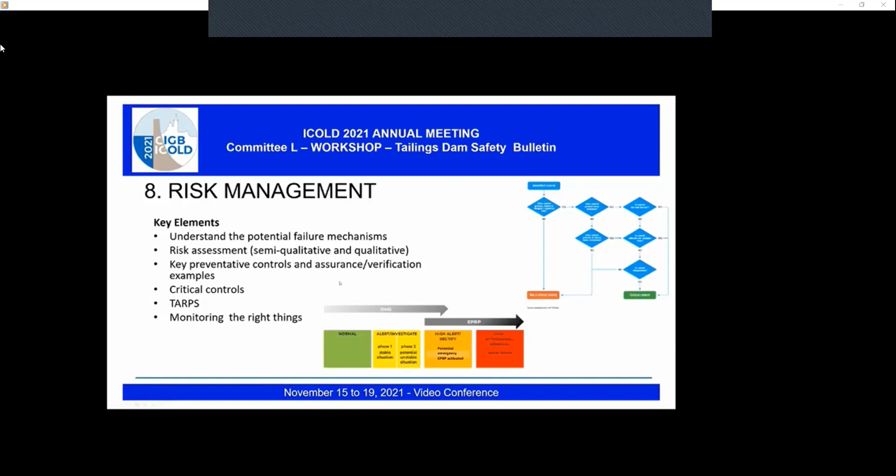Now, as was covered a bit earlier, the dam breach assessment - the Canadian Dam Association has a very good bulletin on dam breach assessment. But the underlying uncertainty with dam breach assessments is understanding - backing up a bit with what David mentioned - you have water eroded tailings and liquefied tailings. I think the understanding of what's eroded by water and what is caused by liquefaction is very poorly understood.

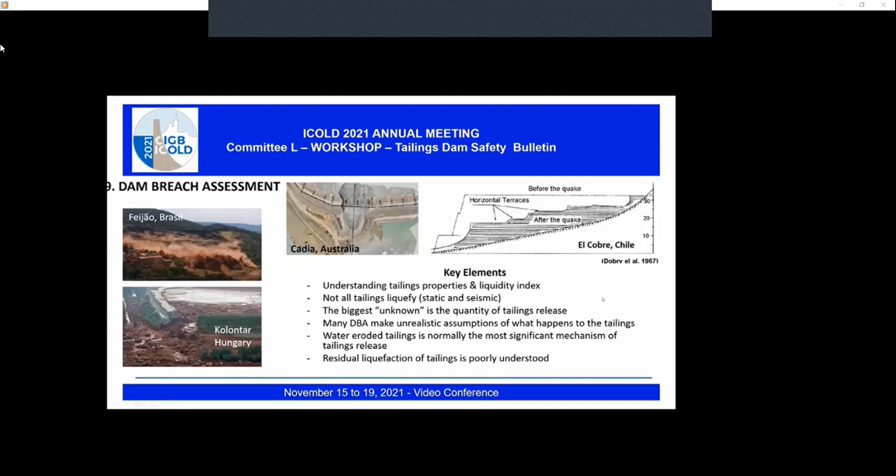I mentioned the emergency response plan, the link back there. It's important - and this is embedded in the bulletin - that the emergency response team and the operational team have to understand this is a potential failure mode. I'll use the example of water: it's raining and raining, and we can quite relate to that today in Vancouver, where the province of British Columbia is in a state of emergency.

We've had washouts of major highways, railways, flooding of towns, and devastation of livestock, etc. So rain happens, and you can get unusual events. If you're on a tailings facility and it just keeps raining, you want to have thought out the scenarios beforehand. Can you excavate an emergency spillway in some abutment or an area of the dam that is less susceptible? Can you raise the dam quickly? What can you do? So it's a key element - the emergency preparedness response plan has to be linked right back into the operations and into the failure modes and the arresting and management of those failure modes.

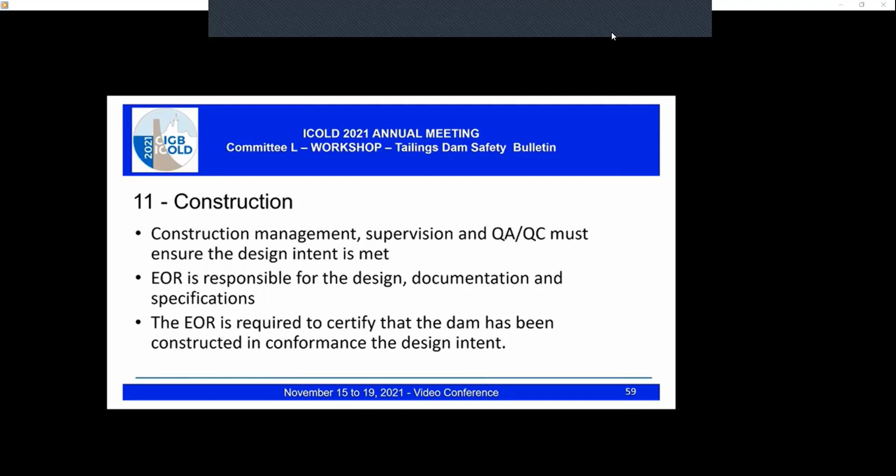The EOR has to sign off on the foundation during all critical phases of construction. It's important to note that construction of a tailings dam, unlike a water dam, is an ongoing process throughout basically the life of the dam. The EOR has to sign off on the foundations, the materials used, and the construction methods used.

He has to be aware of changes to design during the course of construction. Bearing in mind that construction of a tailings dam can go on for decades, there's bound to be changes in the tailings itself, as different parts of the ore body might be processed. There will be changes in ownership of the mine, changes in regulatory authorities or regulations. All sorts of changes, and the EOR has to be conscious of that and keep updated.

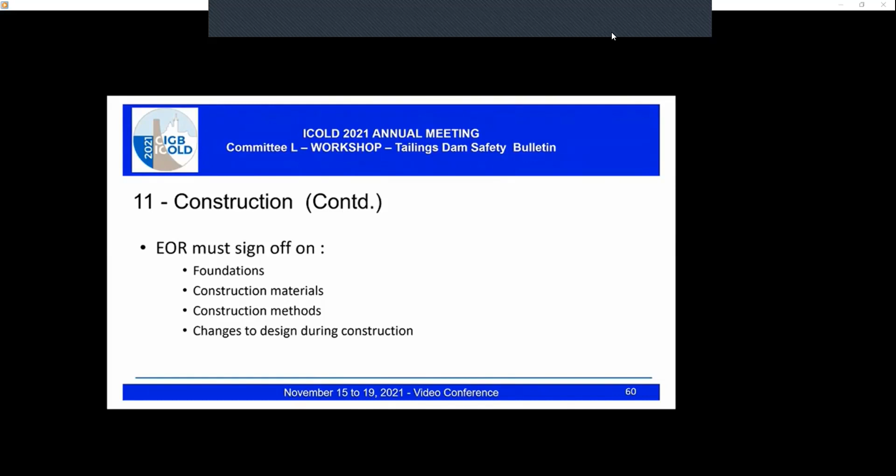Documentation is incredibly important. As-constructed records are absolutely necessary. Construction reports are necessary, and we need a data management system for all construction records. All too often you'll get a query about what happened 10 years ago and nobody can find any record of it. It's extremely important that a data management system is in place during the life of a tailings dam.

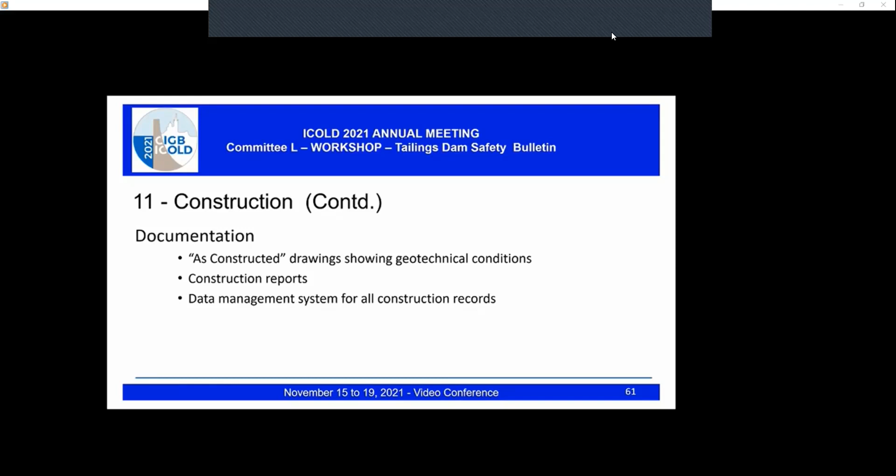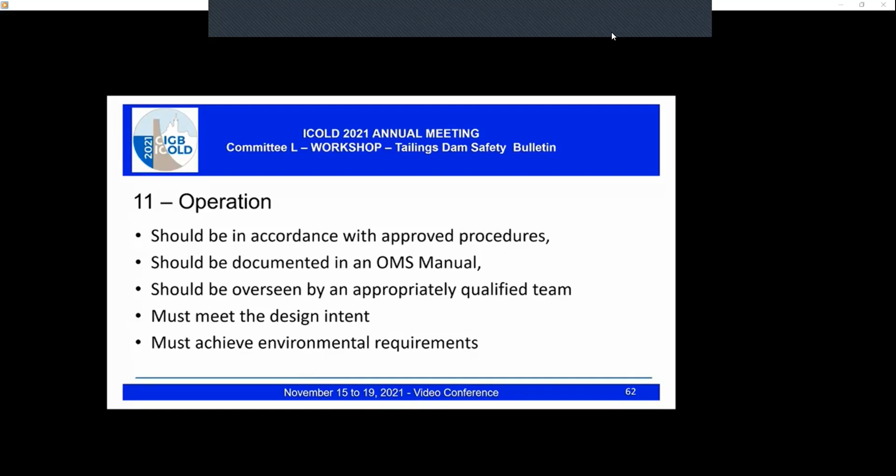An essential part of operation is that you have to control the distribution of tailings to meet both spatial and consolidation requirements. You've got to maintain your pool control properly - pool level, pool position, freeboard. If you've got a pumped decanting system, you need to make sure you've got enough water under your pumps, that your beach lengths are adequate, and you need to optimize recycling of water.

At the same time, we need to try and control dust generation, normally done by rotational deposition on the tailings dam just to keep the beach damp. We also have to ensure during operation separation of contact and non-contact water - you don't want clean and dirty water getting mixed up.

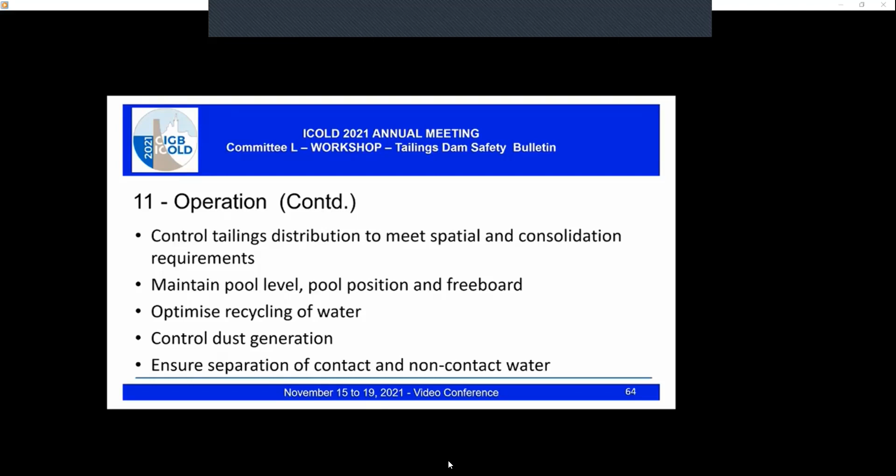Yeah, I think that's the end of it, is it?

The OMS manual is an incredibly important document. It's got to be completed prior to commissioning of the tailings dam, and needs to be updated regularly - it's a living document. As a minimum, it's got to include tailings characteristics, a description of the tailings dam itself, define roles and responsibilities, give a deposition plan, deposition method, and schedule for deposition. It's got to list the key design criteria.

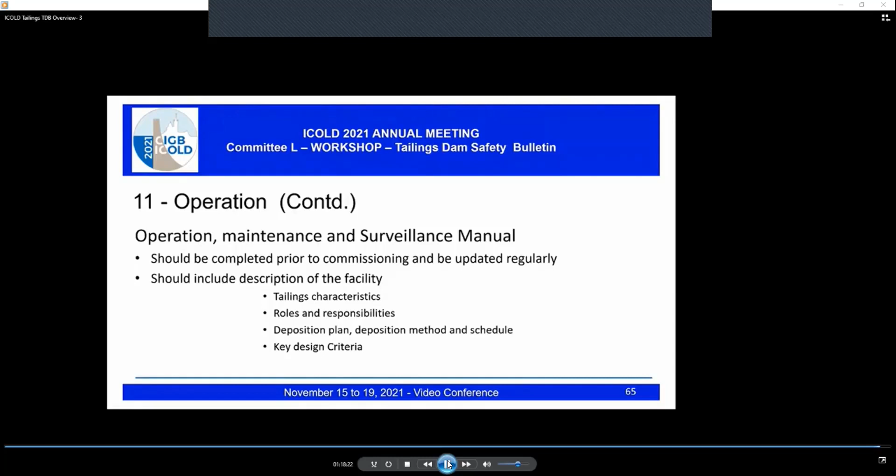There are a whole lot of other aspects. It's got to detail the monitoring and surveillance requirements, have a risk register, maintenance requirements - for example pumps, pipes, spigot points, etc. It's got to list your critical controls and your TARPs as well.

Training requirements are also important - it's very important that operational staff are properly trained to do the job, which relates to the earlier statement about the competence of the operating staff. Finally, there's got to be a summary of the emergency preparedness plan in the OMS document.